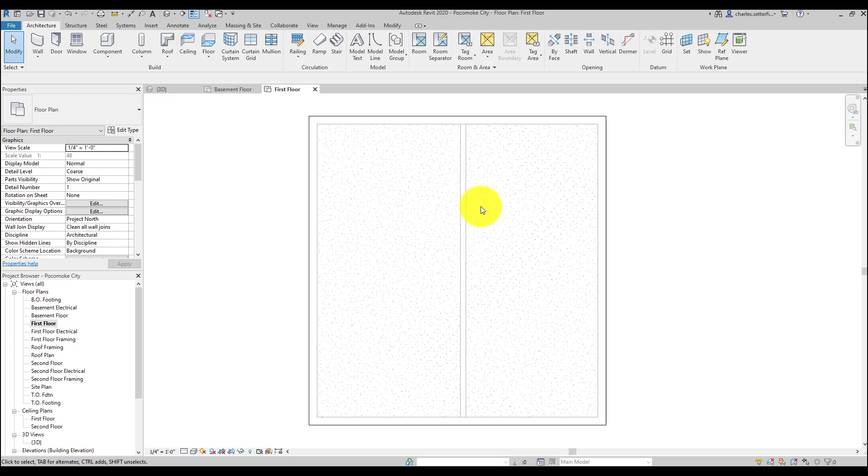Let's go back to the sketch that I did and talk about laying this thing out. So this is my really rough sketch, and I put some dimensions on there based on knowing how big some typical things are, like door widths, stairway widths, the length of a bathtub, the depth of a normal closet, that kind of thing. When 84 Lumber gave us this plan, they didn't give us all the dimensions. So this is kind of trial and error and experience, figuring out how big things are and where these interior walls go. So we're not going to spend a whole lot of time on that, and I'll probably give you a real quick video on where to place those.

I'll place the exterior walls, and I'll place that interior load-bearing wall, and then the rest of them, since they're non-load-bearing, don't really matter, but I'll show them to you anyway.

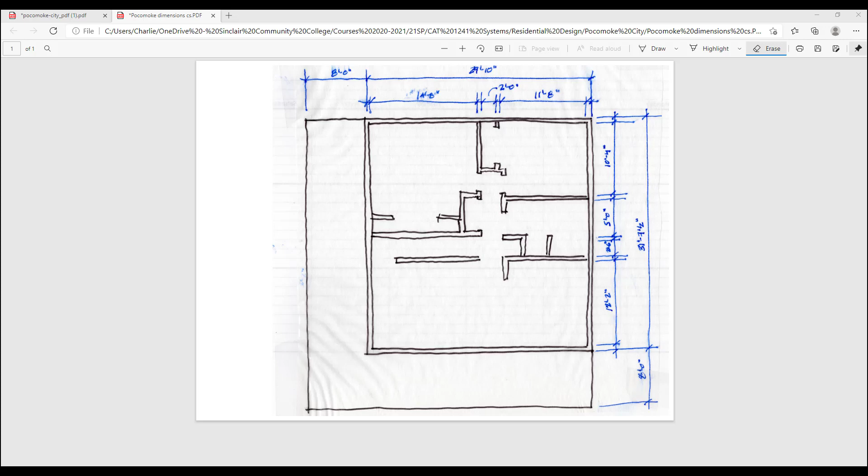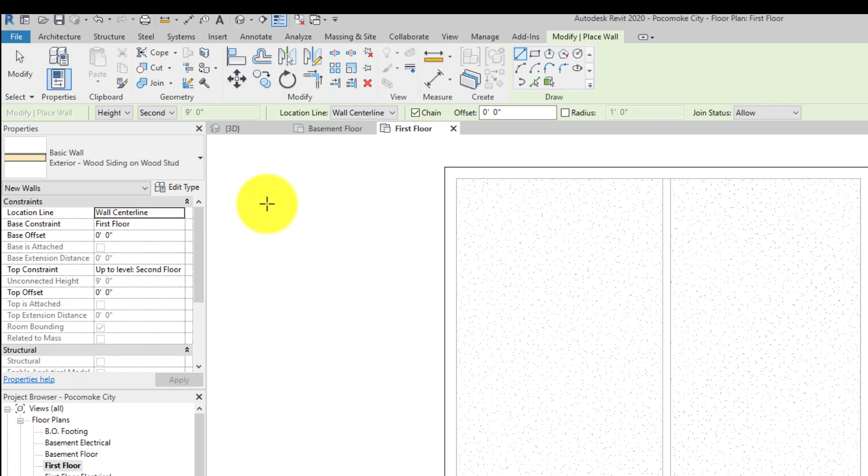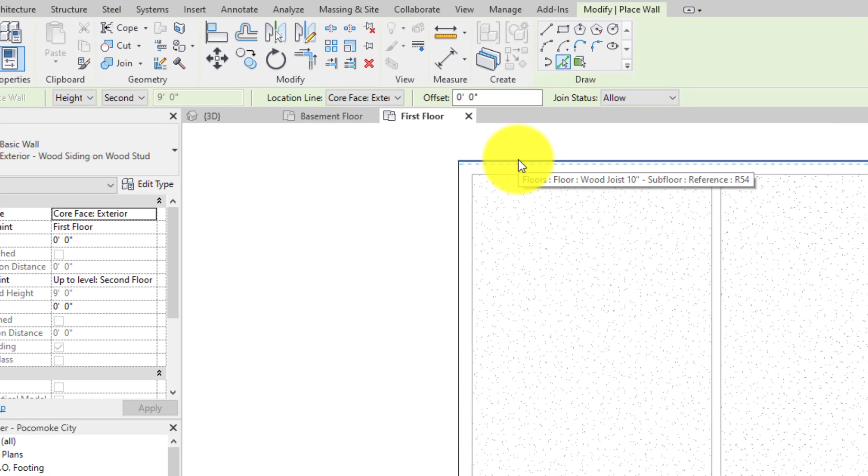Okay, so my exterior walls, I am on my first floor plan. I click the wall tool. The exterior wall that I want to use is wood siding on wood stud, so I click on that one to select it. And I'm going to use a drawing tool here. If I use pick lines and I use my placement line, or my location line, as core face exterior, that's what I want. And then I can simply click on these 4 exterior walls.

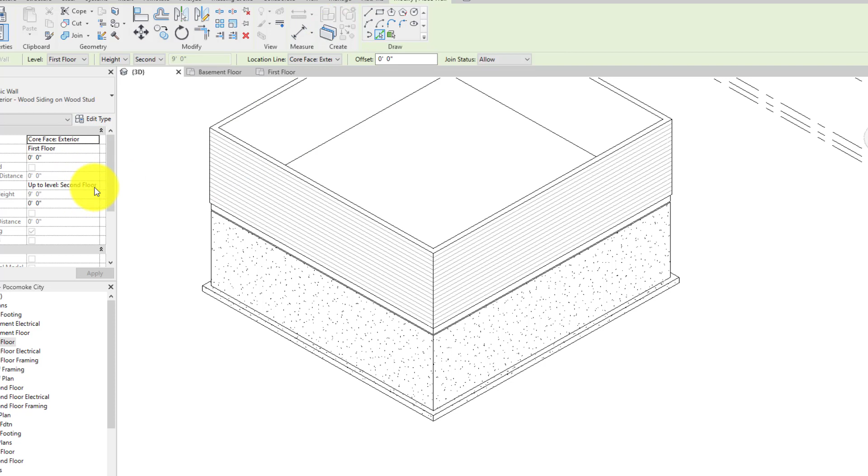And then let's see what I did. If I go back to my 3D view, let's reorient this. I just created those walls, going all the way around, and they start at the first floor and go to the second floor. Okay, that's all right, I can live with that for now.

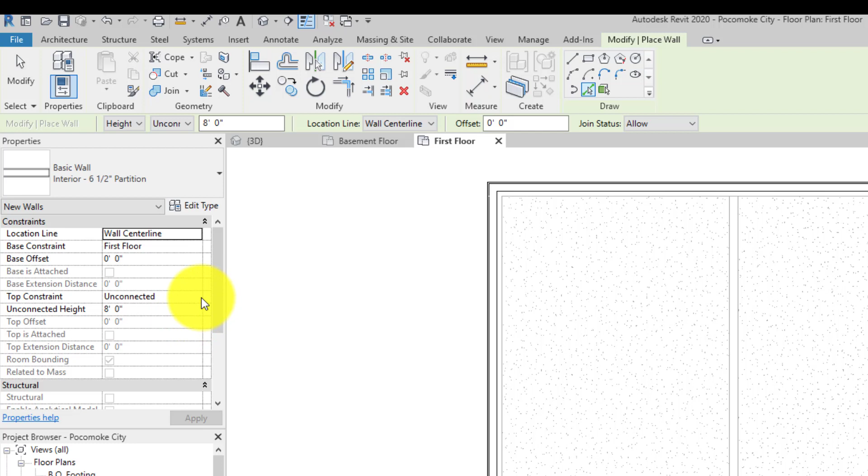So now I have my exterior walls. So now let's go back to the first floor plan, and there's my load-bearing wall that's in the middle. So I'm going to go ahead and use that same 2x6 wall, interior partition, 6.5 inches. Wall center line, I can live with that. Pick lines, first floor, unconnected, 8 feet tall. We'll live with that for now.

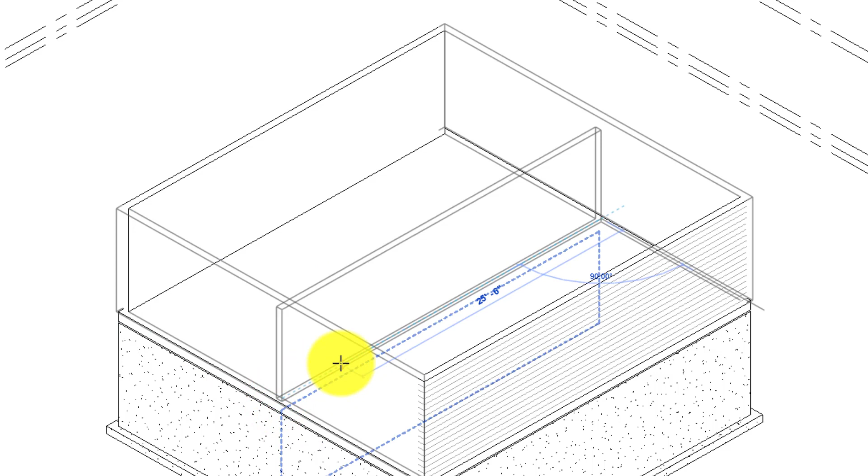And it's not picking my center line. There it is, there's my center line. Now let's go look at that in 3D. So that's my load-bearing wall in the middle of the house. Obviously it goes through the great room right now, so I'm going to grab the end of that wall, and... oops, not sure I should have done it that way.

Let's go back to the floor plan. So I'm going to grab that wall at the end of it and bring that up a little bit. That's going to be where my great room is. So now I know where that load-bearing wall is.

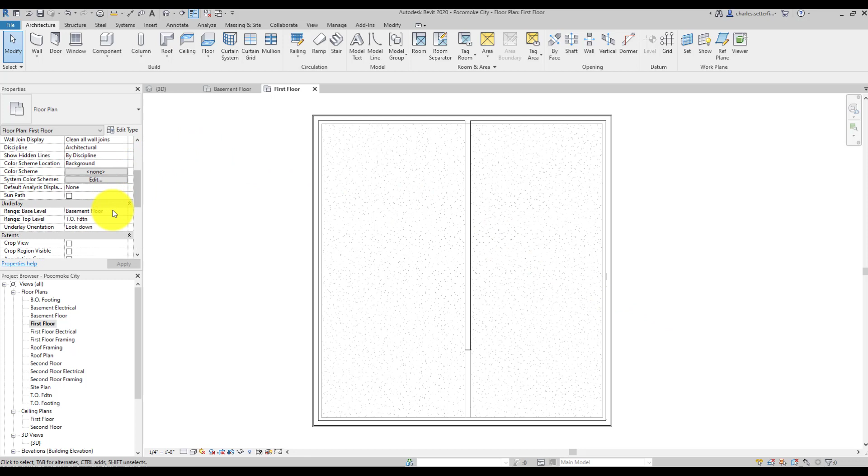I'm going to go ahead and turn off the underlay, and right here it says none. Click apply. So now I'm not seeing that basement. So there's my load-bearing wall. My stairs will be over here someplace, my bedroom's up here, my kitchen over here, that kind of thing. So I am going to go ahead and start doing those.